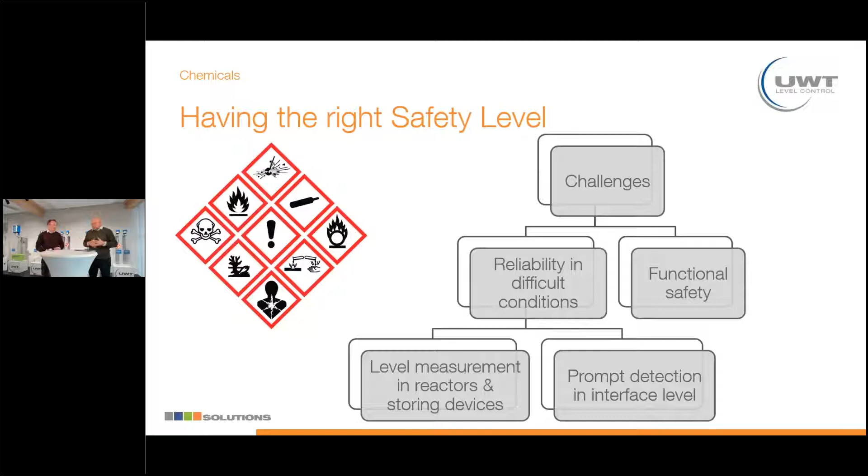So here. That is exactly what I have explained. You see the challenges, and then you see on one side the functional safety, and on the other side the reliability in difficult conditions.

And maybe having a look at the functional safety, the proof testing of the sensor is very important, because at the end of the day it's very important for the client to protect the personnel who are working in the plant. And on the other hand, as I mentioned, the material damages that could happen if the sensors are not working well, if something is happening there, like a cable break. That is why the functional safety is very important.

And there are UWT solutions which have been developed to master that, to offer a resistant and high quality functional safety. And here, Nicholas, we have, for instance, SIL2, which is like a continuous monitoring of the function of our sensor, as well as homogeneous redundancy, which is very important. And Nicholas, what are the specific UWT products having that safety integrity level 2, which is SIL 2?

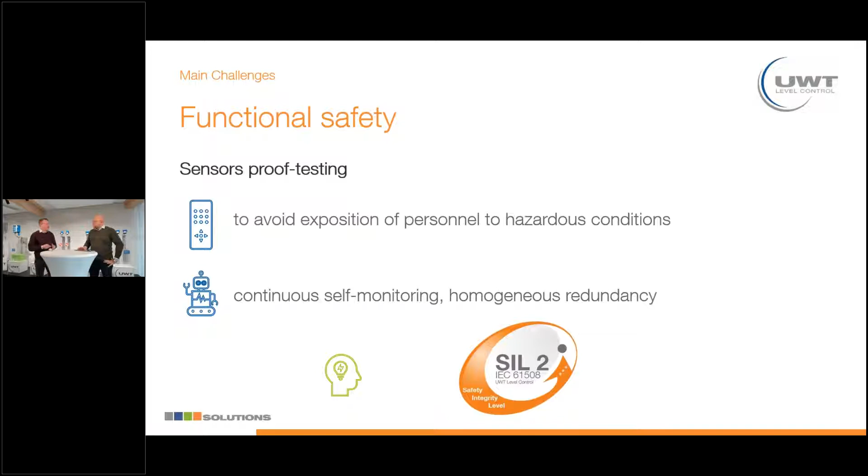Yeah, as you mentioned, in the chemical industry, often a requirement is the SIL 2 functionality. And for this requirement, UWT offers 3 different units. So we have one continuous level transmitter, the NivoGuide, our guided wave radar level transmitter, and then 2 level switches: one specialized on liquid applications, the CapaNivo 8, and the RotoNivo also comes with the SIL 2 functionality or certificate.

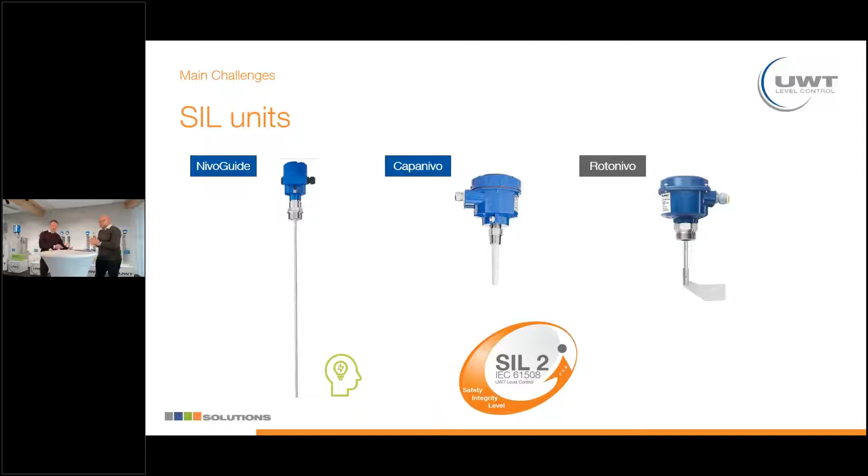Okay, it means here UWT can cover liquids and solids. Exactly. Both. Yeah. That's good. Also point level and continuous level. Okay, that's good.

So here to point out what you already said, reliability is a big issue for the chemical industry. And here we have what is meant with reliability. We can classify it in three different classes. So we have the material conditions that are challenging. We're dealing with aggressive materials, with adhesive materials with a high viscosity. So they might tend to build up, and even with build up, the sensor should perform reliably. And another big issue regarding the material conditions are the changing properties like density. So we have density changes of the material in the chemical industry.

The second class are the process conditions. So often we have agitators inside the tanks, and those agitators cause a lot of turbulences, which is also a big challenge for our sensors regarding the stability. And the second point are the changing conditions like temperature changes and also pressure changes.

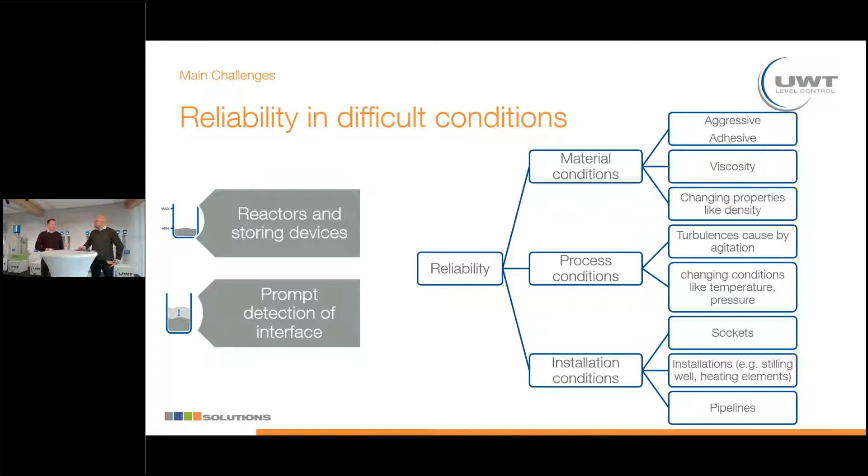Yes, that is very interesting. You see, that is a topic which is very wide, very broad and widespread in the industry. And we are now going to move to the practical part, the concrete part, and we are going to take you through some applications that UWT has really pretty well solved.

And the first one here will be the production of aluminium sulfate, and in that process, high concentrated sulfuric acid is needed, and the task was to find a level sensor which can detect the presence of high concentrated sulfuric acid in the tank. And it was coupled with many challenges: high concentrated acid is highly corrosive, highly abrasive. It was like a pipe, and the place to mount the sensor was very small, and at the same time the process connection was also small.

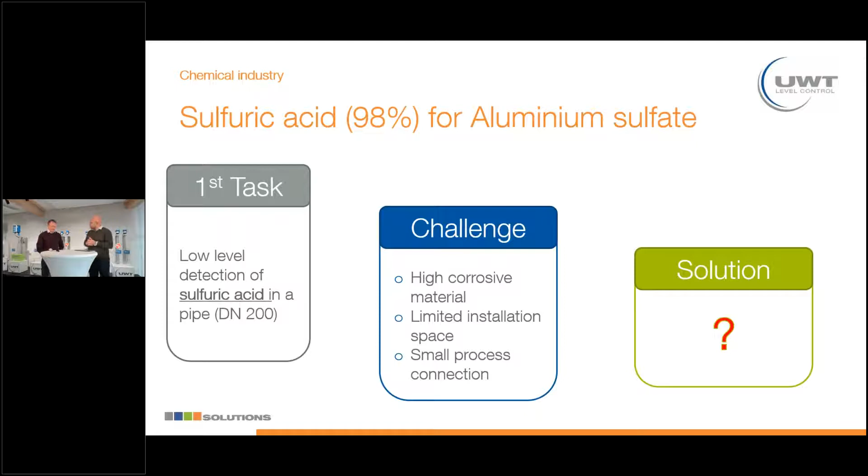And talking about challenges, it's the opportunity to show what we can do, and I think UWT did the work, right? Yes, we did the work, and we did the work with our new CN7 redesign series. So for this application, we installed our new CapaNivo 7121, the complete plastic version.

Here we had a lot of challenges coming together. Narrow installation space means we need a short immersion length. We need a small process connection, and with aggressive material we need resistant materials. Here, our complete sensor is made from PVDF. Easy to set up, so user-friendly setup. It's an easy plug-and-play sensor. And here, our new CN7 was really the perfect solution for this type of application.

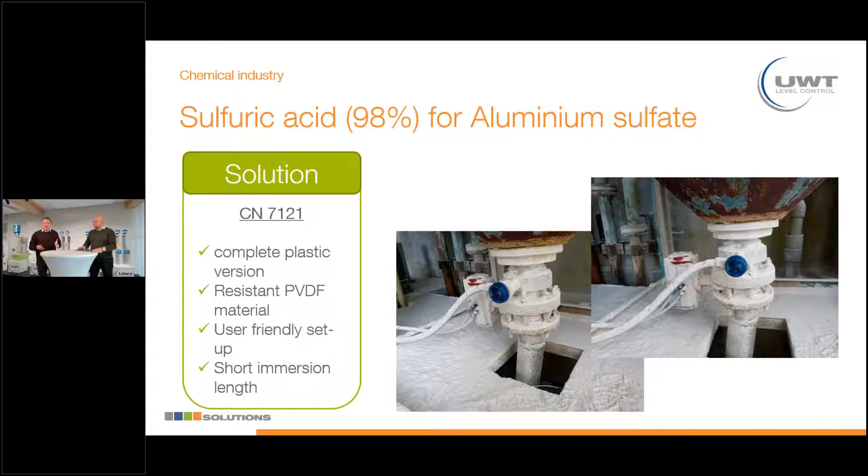And as you know, we recently launched our CN7 series. So I want to give you, not too deep into detail, a short overview of what our sensor is made of and what the specification is. So here I would talk a little bit about the 7121 version. It's resistant for many applications with aggressive materials because it's made out of PVDF, a really resistant material. The whole sensor is completely synthetic.

We have two types of process connections, 1 inch or 3/4 of an inch, so we can fit in different types of holes. We have the short immersion length of 92 millimeters, and also different types of electronics and signal outputs. Either you need a relay or transistor, or 8/16 milliampere signal, or we even have the continuous mode if needed. So this is the new CN7, perfectly designed for aggressive materials and aggressive atmospheres. And in this application, it worked really well.

That's good. That's good. Thank you, Nicholas.

Now we're going to move to another field. As I mentioned at the beginning, the chemical industry is very broad, and now we are going to the petrochemical field. There, the challenge was to measure continuously the level of petroleum products like diesel and kerosene. And there were also many challenges here, like the mounting conditions. The sensor should be mounted in a stilling well. That was the condition of the customer.

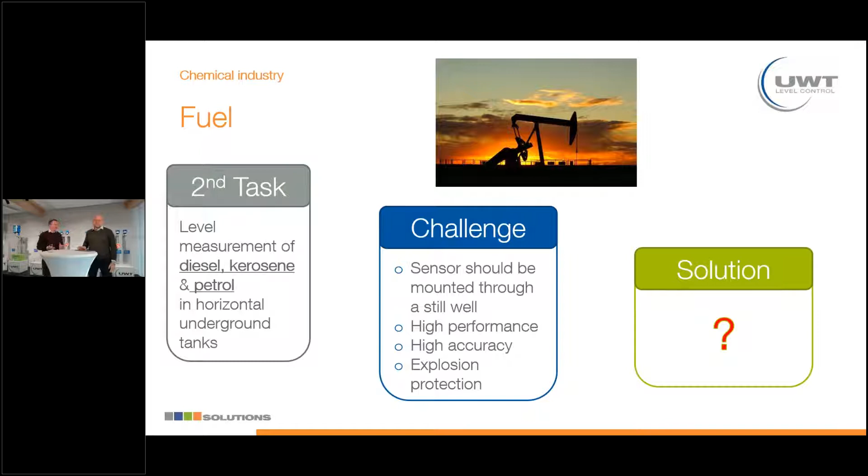And the stilling well has the same effect as a coax version for the Nivo guide. So all the energy is focused inside the stilling well. So perfect conditions for the Nivo guide to measure the level, reliable, and it has all the Ex certificates. System materials, stainless steel, and here we used the rod version of the Nivo Guide 8100, our guided wave radar level transmitter for liquid applications.

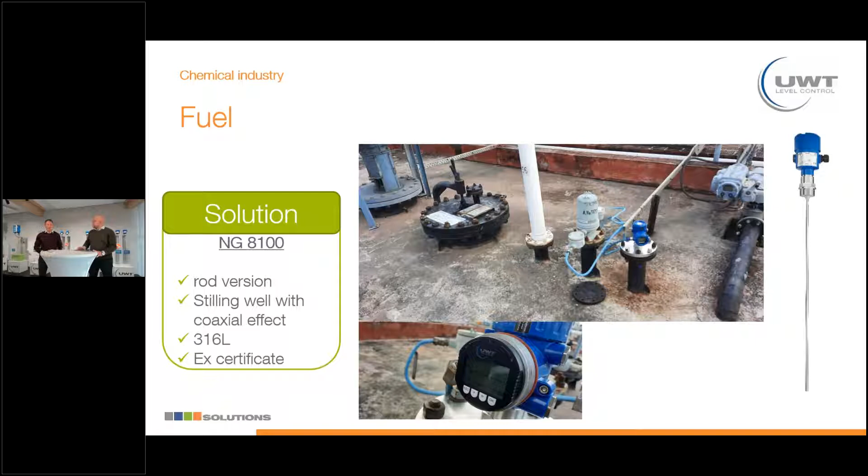And to the challenge, we can even here add the hygienic, because in that sector, veterinary, it is very important to have hygienic material and to ensure really the high quality of the product. And I've already mentioned the high temperature, and a main challenge here was the turbulences, because in a reactor, by mixing, you need to agitate the product inside the reactor, and at the same time, it should not disturb the measurement. The accuracy should be kept high as well as the performance.

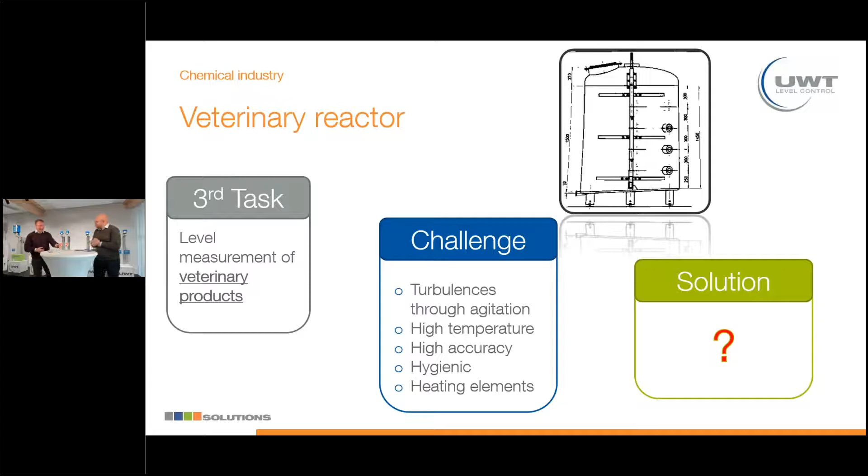Yes, and I think here UWT has offered something special, Nicholas. Yeah, Valerie, thank you very much for this application, because there are so many things we can explain. So first point, we use the NivoGuide here in this application, and there are really a lot of things we can talk about. The first thing you see on the left picture. So we use the NivoGuide as a coaxial version, with Tri-Clamp process connection.

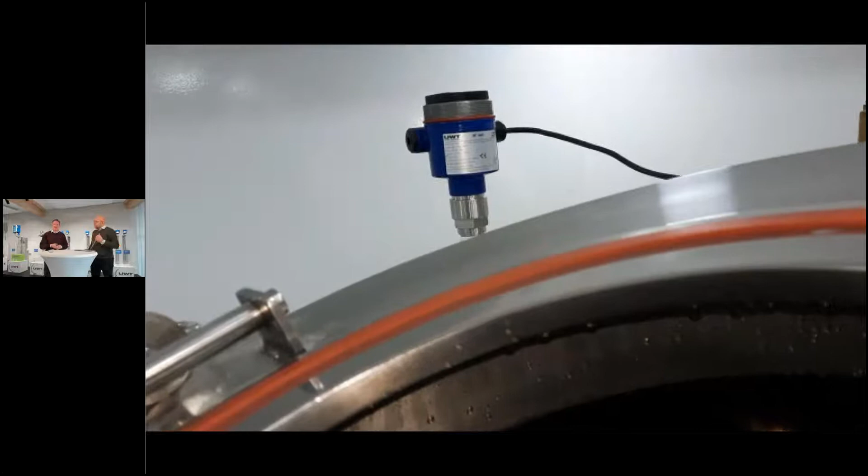So we had also a little socket here where we had to mount it. Then we had heating elements inside the tank. You can see it on the right picture. At the bottom, we had to fix the coax version to fasten it at the tank wall. And why we did it, we have 2 videos. What you can see here, we have an agitator inside the tank. So here you can see the blades, and on the left side you can see our coax version that is really mounted near the tank wall, and also the blades are not far away from our unit.

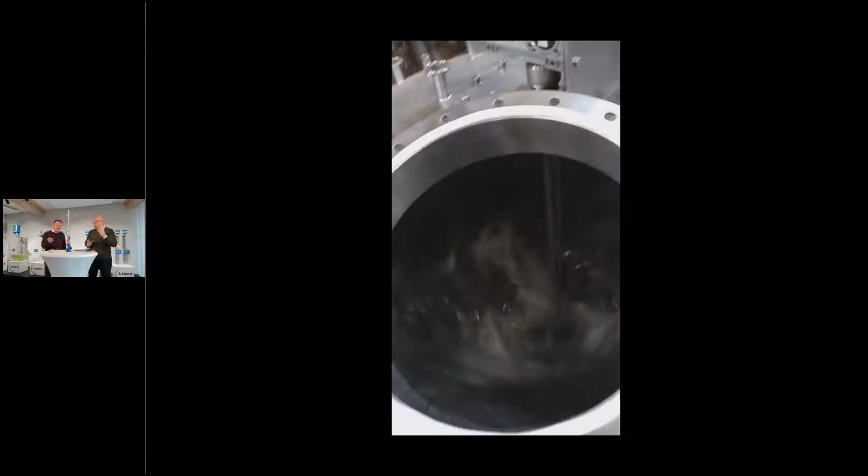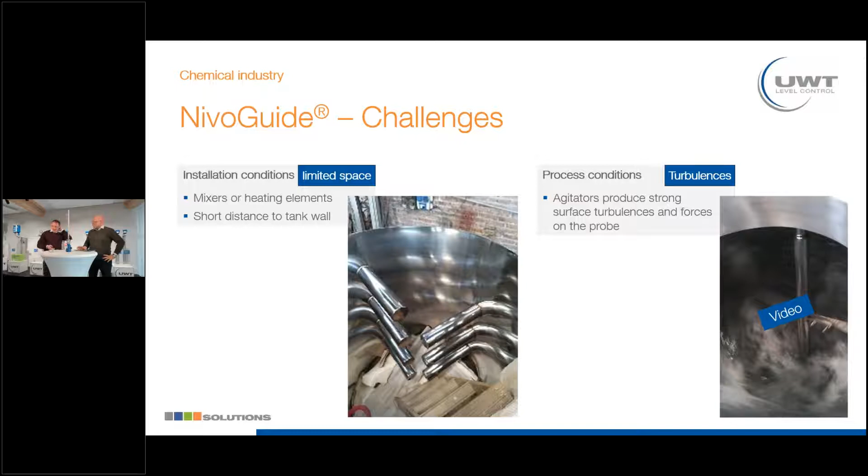Okay. And the other pretty challenging condition was that we had the agitator and all the turbulences inside the tank. So we had limited space and the turbulences, so we needed the coaxial version, because of all the benefits from the coax version. So the energy is focused inside our coax tube. This is important to get no false signals from the agitator and maybe also from the tank wall, because we recommend to mount it a little bit far away from the tank wall. But with the coaxial tube, there is no need to care about any installation limitations, agitators or things like that.

The other effect was that we had these turbulences inside the tank, and with the coaxial tube, the surface inside this coax tube is calmed. So we get reliable measurement results. We do not have the effects of waves or of this turbulent surface inside our tube. So the surface is calmed here. It also protects the unit. So we have a more stable probe here with the coax tube, and it can be easily fastened.

Maybe stop you, because we have seen the video there with the agitation, those turbulences. Do you mean the measurement there was really highly accurate? Because those turbulences were really strong. Yes. So due to this coax version, we have calm inside our coax tube, so the surface is not as turbulent as outside. So here we get a pretty stable measurement with our NivoGuide.

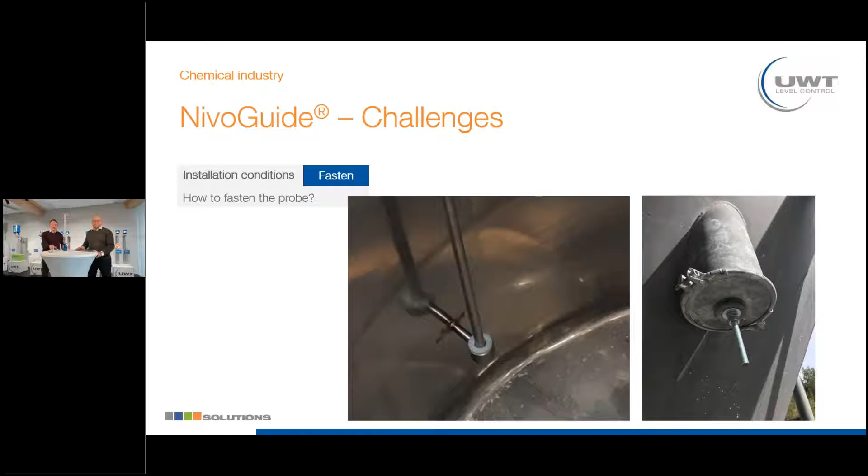To give a short recommendation, we go to the next slide. Here we have two recommendations of how to fasten the probe. What we recommend is that we have an isolation between the tank wall and the probe, maybe the coax version, maybe the rod version, maybe the rope version, so that we have an insulated part.

Recommendation 2, you can see using two eyebolts and then an insulated cable to fasten the rope version. On the left side, recommendation number 1 is with a threaded rod - this is screwed inside our sensor, and then using a plastic element to insulate the silo wall from the rope. This one is fastened with a lock nut, and then we have the insulation between the sensor weight and the silo wall. So these are the two recommendations we give if it's necessary to fasten the probe of the NivoGuide.

Interesting - it means UWT has three versions of NivoGuide, because you mentioned here Nivoguide with the rod, then Nivoguide with coax, and then Nivoguide with rope. That is very interesting. Yes.

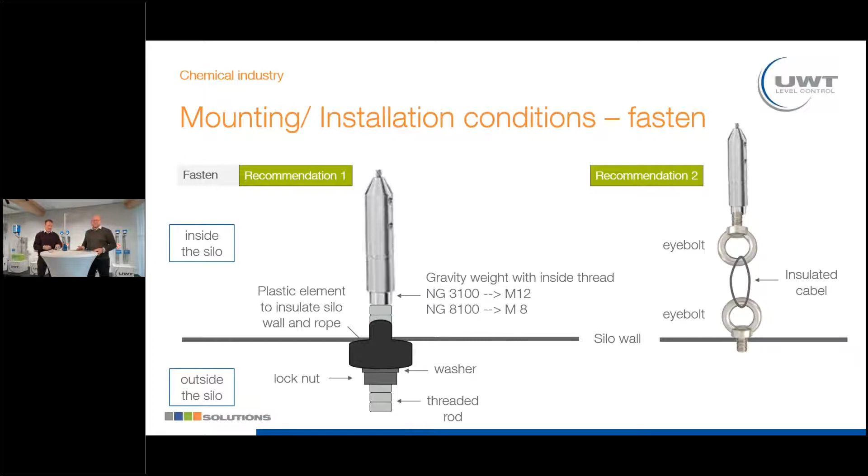Okay, now we are going to move to the next beautiful application. Here it was hydrochloric acid, and the challenge was to measure the interface in foam. And as I mentioned at the beginning, interface measurement is very widespread in the chemical industry, because when you have interface, you are increasing the surface of reactions. At the same moment, it's important to know exactly where the interface is, what is the level of the interface.

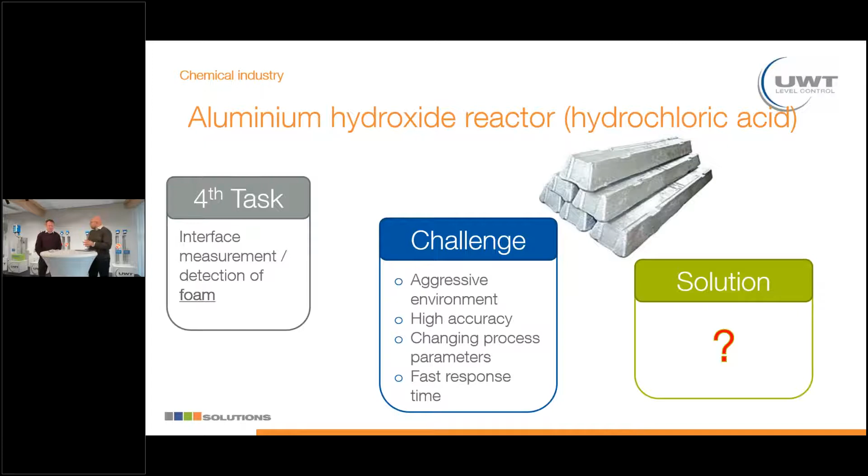Nicholas: here we had, like you explained, the aggressive environment. So we had to solve this application with a special version of our capacitive level switch, the Capanivo 8100. As you know, we have this little tube element made out of stainless steel, and also a stainless steel flange process connection. Though stainless steel might not be resistant enough for this application, that's why we coated our stainless steel part with PVDF.

So we had a coating around our rod and the probe - the measuring part of the Capanivo is made out of PVDF. So we had the resistance here guaranteed with our coating and with the elements used for the measuring part of the sensor. Then we have again the tip sensitivity, perfect for applications with foam, fast response times, so it reacts pretty fast. We also have the easy calibration setup, so you can adjust the sensor to the foam to ignore or to detect the foam. In this application, we had to detect the foam, so the Capanivo worked perfectly in this application.

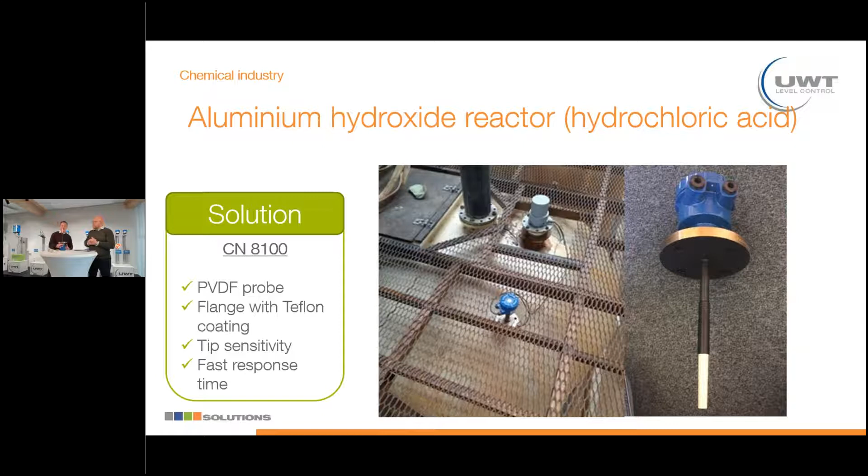And I think here even the process parameters were not stable - they were changing, and as you can see, even that special challenge was mastered using the Capanivo. Yes, because you can adjust it so easily to the different process conditions - this is also the big advantage of capacitance level limit switches. I have it here so that you can see our sensor.

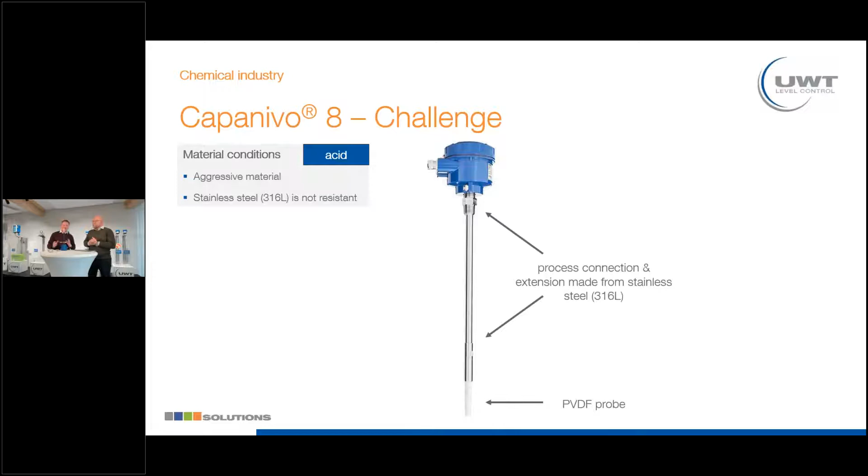So here you can see this is how it normally looks on the slide. We have the stainless steel element, and when we have acids or aggressive materials, we can offer this version where we coat the stainless steel element and also coat the flange. That's why it's black. So this is the coating of the sensor, and with this unit you can also solve applications with a pretty aggressive environment.

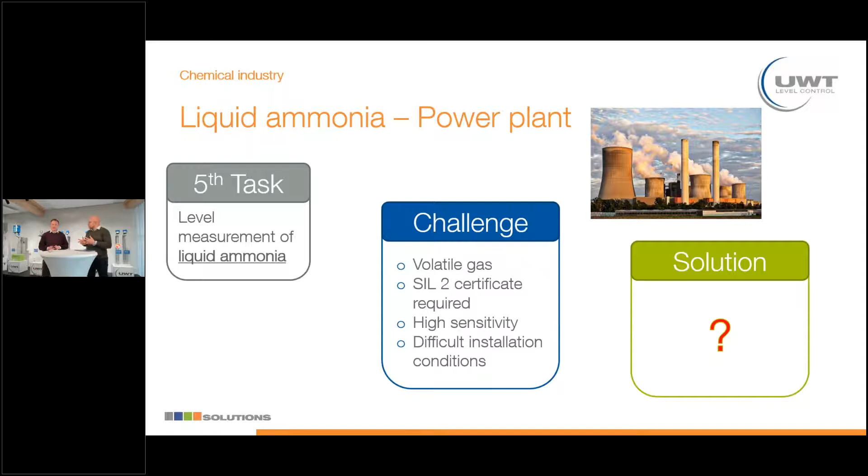Very interesting. Okay, now we are going to move to another classic in the field of chemistry, chemical industry: liquid ammonia. It's a very challenging material because it has different features - the property can change during the process. Here the task was the level measurement of liquid ammonia, and as I mentioned, it's a volatile gas. Even here, the customer required functional safety, SIL2, and even high sensitivity was very important. Another challenge was the difficult installation condition, and that is a classic also for UWT. So what was the response?

Again, it was the Nivo Guide that we installed here. We had a bypass installation, bypass as well as stilling wells, the same effect as a coax version. So here, stable measurement results. We have the SIL2 certificate for the Nivo Guide, and also we have the second line of defense - a special sealing design for our Nivo Guide, optimized for ammonia application, volatile gases. And here Nivo Guide works perfectly.

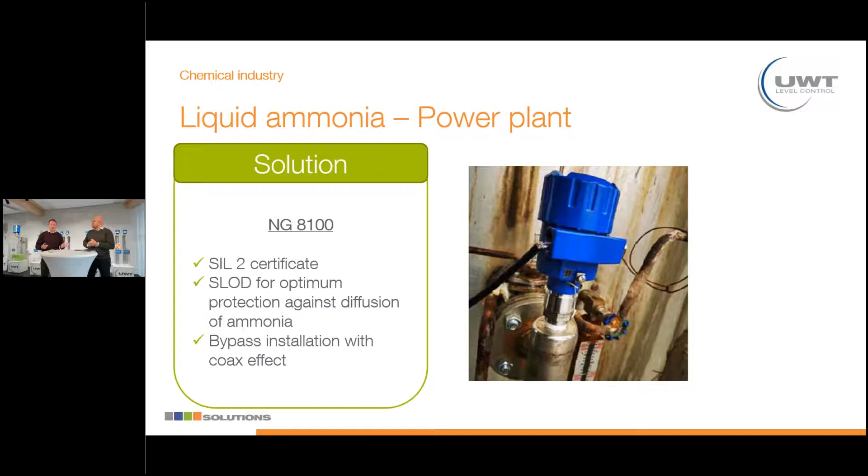So what I want to focus on are the toxic gases and aggressive vapors. What makes the Nivo Guide special for those two types of challenges, because maybe a normal sealing design is not sufficient for toxic gases, and also aggressive vapors we need special sealing versions to protect the housing and the electronics. Exactly, and this is what you can see now on this slide here.

So here we have a cut model of the Nivo Guide 8. You can see the second line of defense on the upper part of our sensor. This is this additional protection, additional sealing. It's borosilicate glass feed through this second line of defense, and it just stops toxic gases from entering the housing. So we can guarantee safe operation also for the workers.

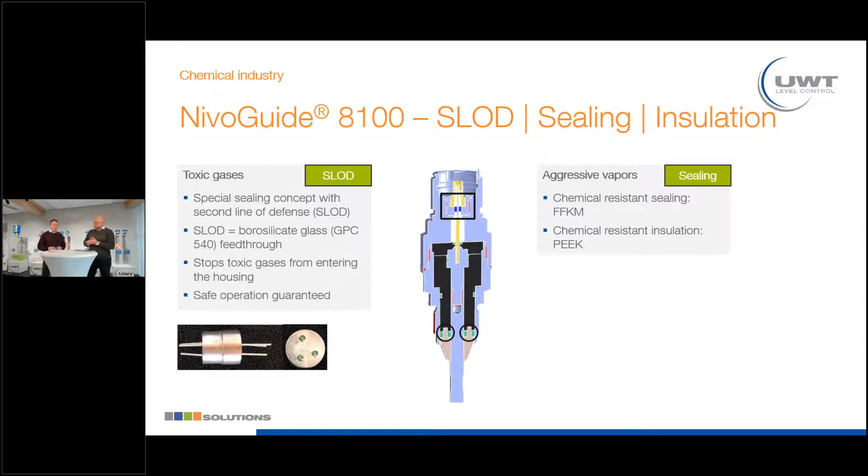And on the right side, for aggressive vapors we also need special sealings. The normal standard sealings might not be resistant, and for those extreme aggressive environments we have our FFKM sealing inside this little coupling here, and also the chemical resistant PEEK condensate cone on the lower area. So as you can see, Nivo Guide is also perfectly designed for those applications where it's pretty challenging.

Oh, that's very interesting. Yes. And now I think we are going to discover another UWT solution, which is also pretty nice, like Nivo Guide. I think with the next application here, the task was to measure the level of high concentrated sulfuric acid, and the challenge was the high corrosive effect of the acid. The acid is aggressive, and even here the accuracy was very important to know exactly the level in the tank, and even the response time should be very fast.

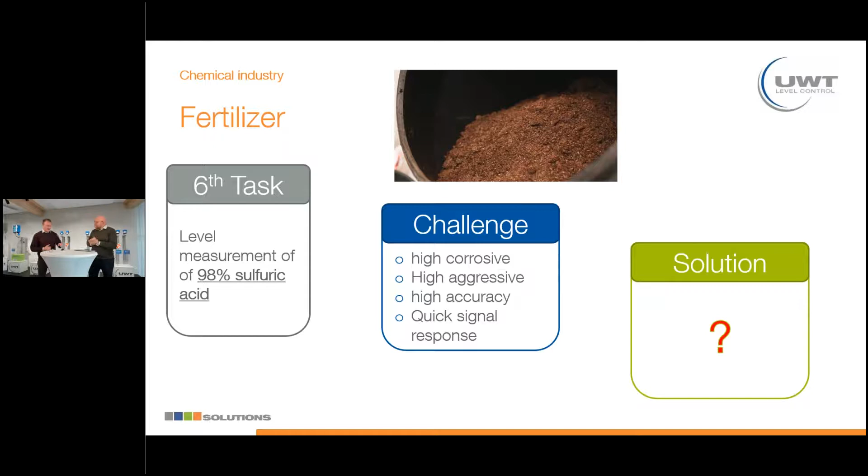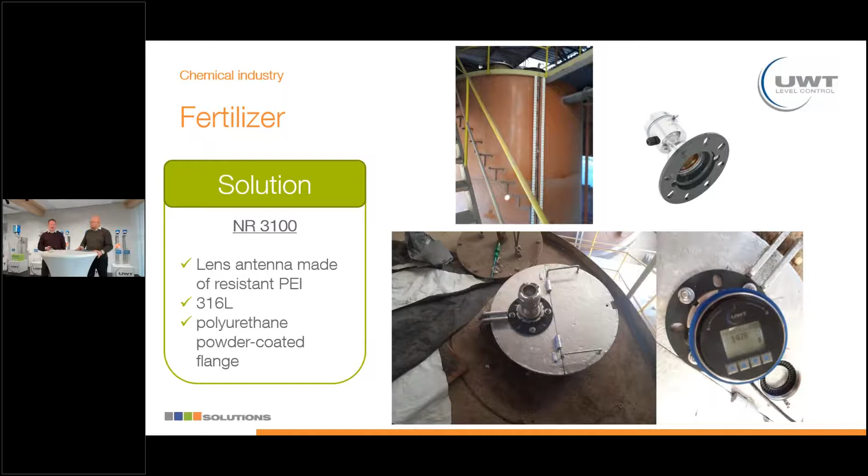And here's what UWT offered. We installed our continuous radar level transmitter, the Nivo Radar 3100, the non-contact radar transmitter that comes with a resistant lens antenna made out of PEI. We have a stainless steel housing, and we also have this polyurethane powder coated flange version. So here the Nivo Radar measured perfectly in the fertilizer. So also Nivo Radar can be used for the chemical industry, for the chemical sector - that means not only Nivo Guide, even Nivo Radar as a non-contact level transmitter.

Yes, wow, and many options. And also we have one accessory for the Nivo Radar when it comes to even more aggressive environments. We have the PTFE protection plate, which is mounted below our normal flange here. With this protection plate, the process connection is then even more protected from this aggressive environment, and also the lens antenna. And one thing to mention for this plate - it's really made for our Nivo Radar, so it has a certain thickness.

So this thickness is adapted to the transmitted frequency, so that we do not get any interferences from this plate, and we installed it in many applications, and it worked pretty well.

Okay, here this flange is black. Is it a coating? Yes, this is polyurethane coating. It means normally when we have both, it's like a double safety that we offer. Exactly, exactly the process. And it's also easy to remove the plate and just change it out, and you have this additional protection of the Nivo Radar. Ah, interesting.

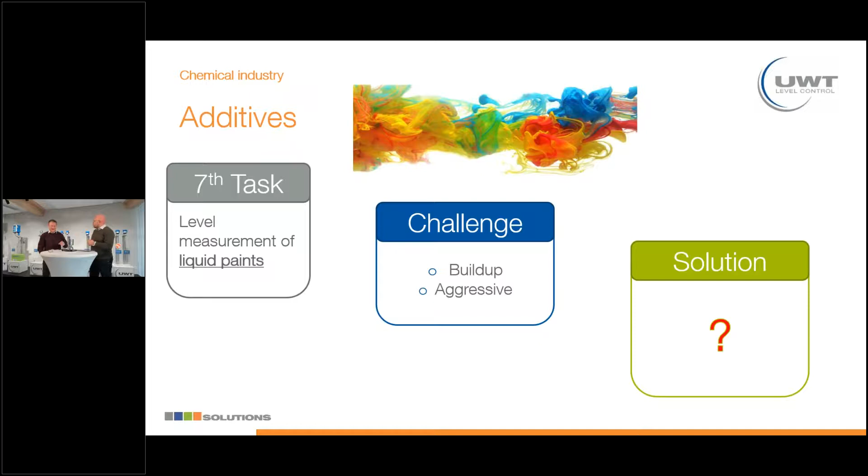Yeah, I see that, this is correct. So build up - the new RF Nivo 3100 with active shield technology helps to ignore all this build-up from the paint, and we also have this quick response time.

So with our capacitance level transmitter, they are reacting really quickly. They are really accurate, easy to set up, easy to calibrate.

Especially our RF Nivo 3100 with automatic calibration - it's just one push button, and then the sensor is perfectly calibrated to the different application conditions. Also one important thing is the modular design, so you can configure the sensor to whatever you need, whatever the installation condition looks like. You can vary the length of the active part, of the inactive part, so there are a lot of options.

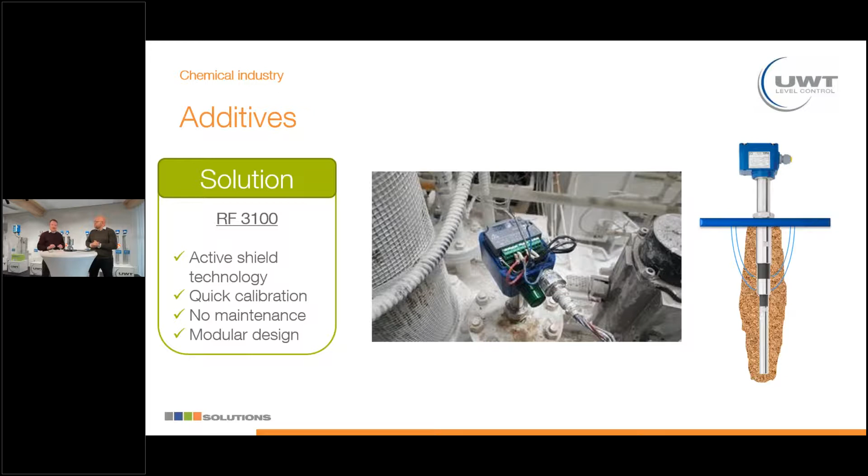We also have resistant materials, resistant isolations. As a special version, we also offer the RF Nivo 3100 with the coating here. So you can see we have a fully coated extension here, PTFE coating, and also a little plastic element made from PTFE - an additional threaded element that you can screw in.

Okay, and that coating - a question maybe - doesn't it affect the active shield technology? No, it has no influence on the measuring principle, on the accuracy of the active shield. It just ignores our coating and still works pretty well.

So we used this type of sensor with the coating especially for flue gas cleaning processes, where we have hydrochloric acid - aggressive material - and then we're using the coating. We do not only have the threaded version here, but also a flange protection plate, comparable with the one from the Nivo radar. So if you need a flanged process connection, we can also offer a solution.

Okay, and that is a point level, that is to detect the presence of the material here, in that case liquid paint. Yes. Okay, thank you, Nicolas.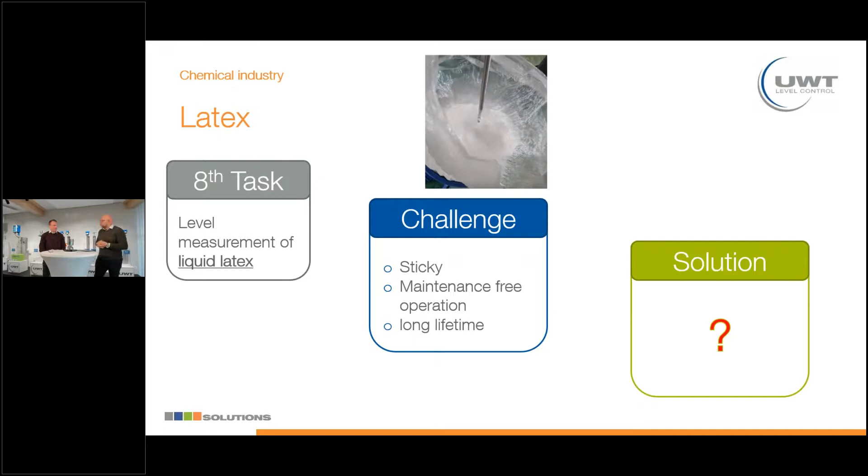Yes, Nicolas, what was the solution here? Yeah, here again RF Nivo, but this time the RF Nivo 8200, the one for liquid applications and for higher temperatures. So this is what we used here.

It also has the active shield technology, the inverse frequency shift, to give it a very high sensitivity, so it's easy to adjust. When you have build up, you want to ignore it, you have to adjust the sensor - this is really, really simple with our sensors due to the inverse frequency shift technology. And again, the fast response time - capacitive technology, always present in the chemical industry.

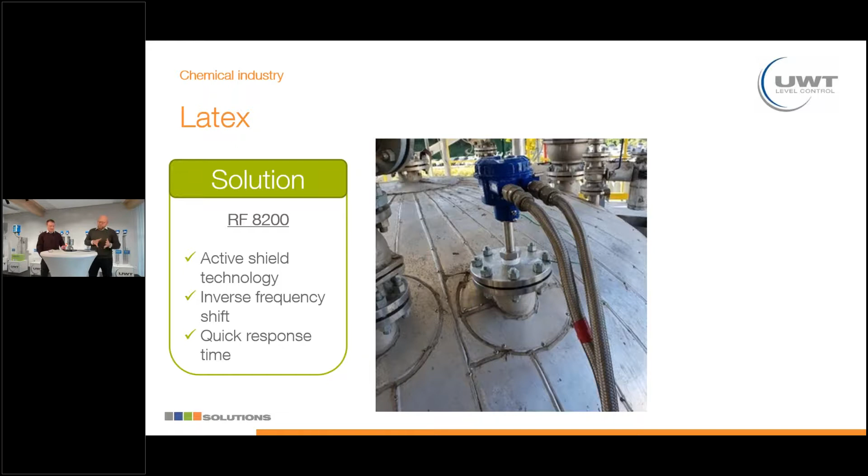Good. Yes, that's very interesting, and I'm quite sure our UWT customers are quite satisfied with what we are offering. Yes, the different solutions. Okay, and now we are going from liquid to solid, and that is tire production.

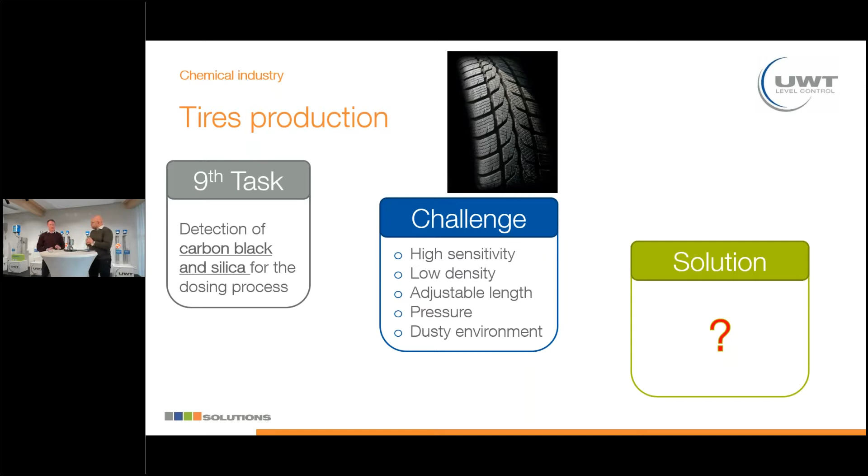And the task here was the detection of carbon black and silica. Even here, it was coupled with challenges: the sensor should have a high sensitivity, and the density of the material, carbon black and silica, is very low. That is a big challenge. In the process there was pressure and even dust, because those small particles create a dusty environment. And where there are many challenges, UWT is there, and here also the Rotonivo is there.

So we can also find it in the chemical sector, of course. Here we have the PTFE sealing, so resistant materials, and a stainless steel shaft and paddles. For this application, the sliding sleeve was important because they want to adjust their switching point for different conditions. So we implemented the sliding sleeve, and with the sliding sleeve we had to use the pipe extension so that you can really adjust your switch point wherever you want it. And yeah, Rotonivo is always working perfectly, also in the chemical sector.

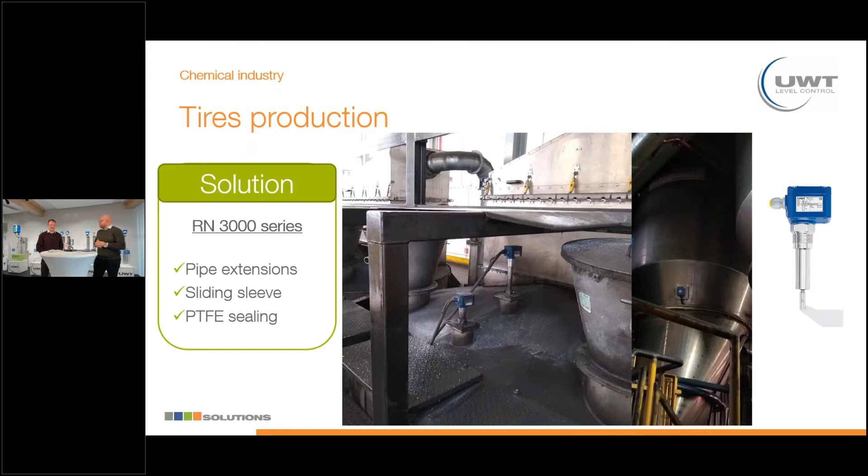Interesting. That means quite all UWT solutions are very suitable for the chemical industry, when I see those high demanding applications. An all-rounder. Yes, all-rounder. Okay, then let us move to the next high demanding application.

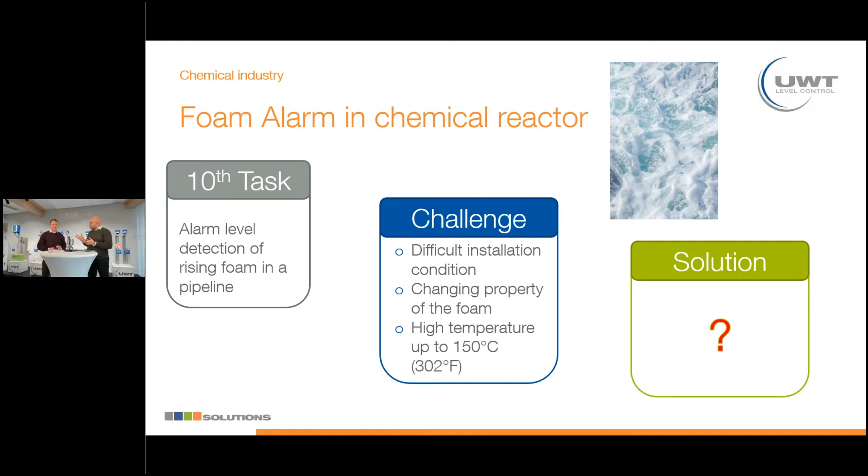The task here was to detect something which is not suitable for the process or the product. It was foam, and the customer really wanted a sensor that can detect foam, like a foam alarm, to be able to remove that foam from the process. And here, apropos challenges, we had difficult installation conditions. The temperature was high, and also something very widespread in the chemical industry that we mentioned at the beginning: the changing process parameters, or in that case the changing material parameters. And what was the solution from UWT?

If you want to measure foam, also with changing properties, just adjust it once, and then you will get a reliable measurement result. For this application, the customer was really satisfied. We had no issues with the RF Nivo, although this application is pretty challenging: narrow installation space, rising foam, high temperature, but the RF Nivo 8100 did the job.